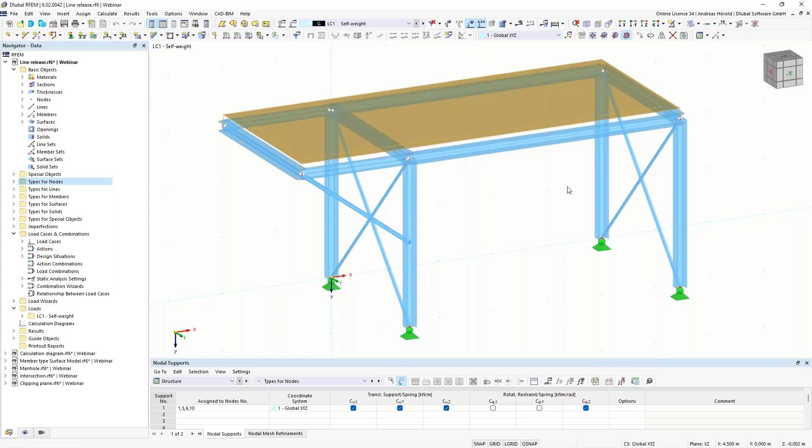It's a quite simple structure, a steel construction, and on the top of the steel construction is a concrete slab with an eccentricity. I double click on it, and I checked here eccentricity. When I go to the eccentricity, you can see that it is an automatic offset, and I defined that the bottom of the concrete slab is at the same place as the top of the steel structure, member number 18. This is member number 18.

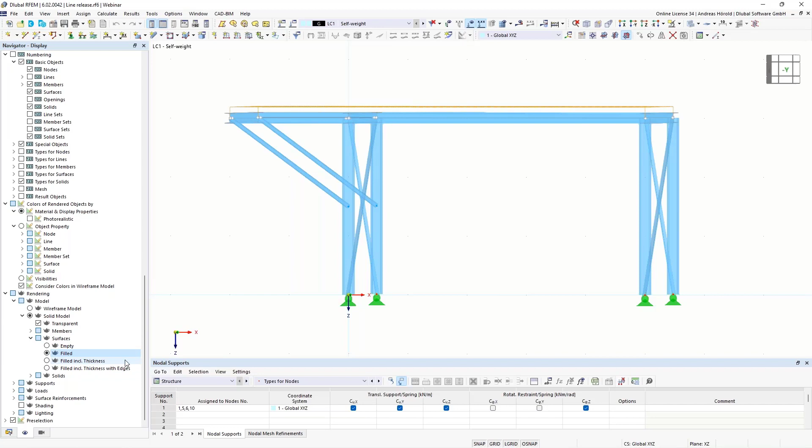Okay, to see it better, I go to the navigator display, then solid model, surface is now filled, and this is filled including thickness. Okay, I would like to display it without the thickness. So the target is that when I assign a load in that field here, this area of the slab can take off. This isn't the case at the moment.

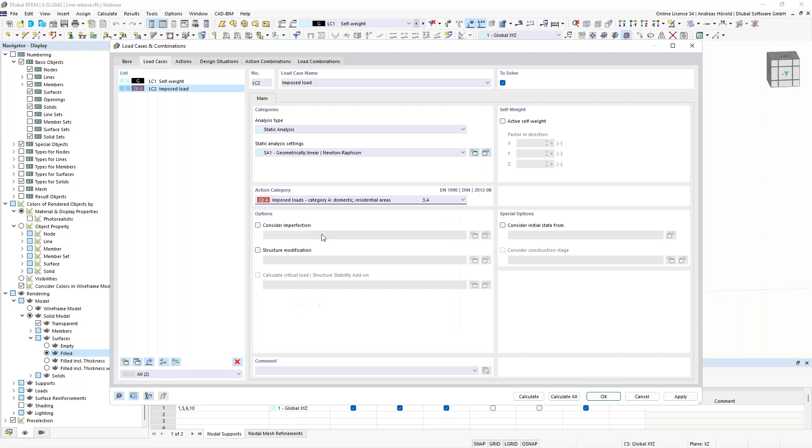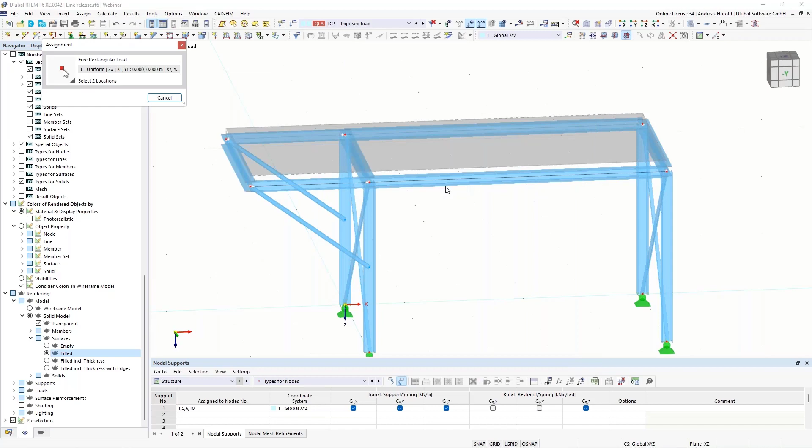Let's try that. I create a new load case with the action category imposed loads. Since it is a full slab here over 2 fields, I have to define a rectangular load: insert, loads, and then rectangular loads is the feature that I use. So I select the slab. Then a quite high load, 20 kilonewtons per square meter. And I define the edges. Okay, that's all.

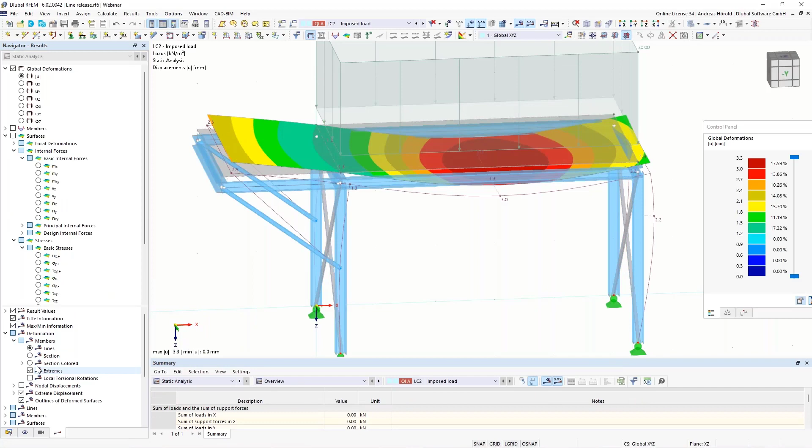So, I calculate the load case. And you will see that the concrete slab can't take off. I displayed the sections colored. You can see that the slab doesn't take off here in this area. How to do that? With a line release.

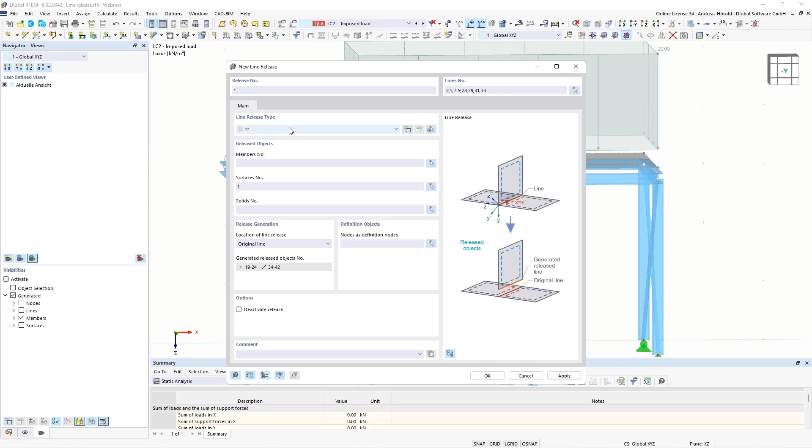So insert, special objects, and you can find the nodal releases, line releases, and surface releases here. They act the same way, and in this example I use the line releases, since they work similarly. I select the lines, all the lines in place, and I release surface number 1. It's only one surface, and I have to define the line release type.

In the first step, I release the u-z direction, and I use this nonlinearity fixed if positive u-z. That means if the load is in plus Z direction, it is fixed, but it can take off if the load is in minus Z direction. Okay, let's try that. We calculate the load case again.

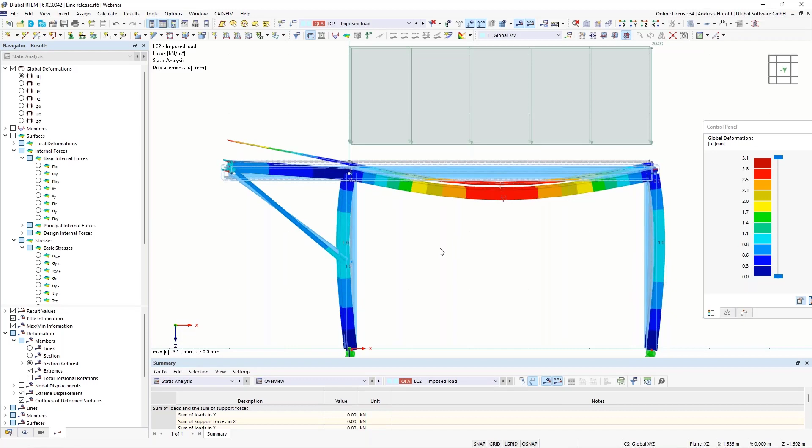So, and now you can see that the concrete slab takes off. But in that area, the beams act as composite beams because of the eccentricity of the concrete slab. At the moment, we have a deformation of 3.1 millimeters. And when I release the slab in direction X and Y, then we will get a higher deformation. Then the concrete slab lies loosely at the top of the steel structure.

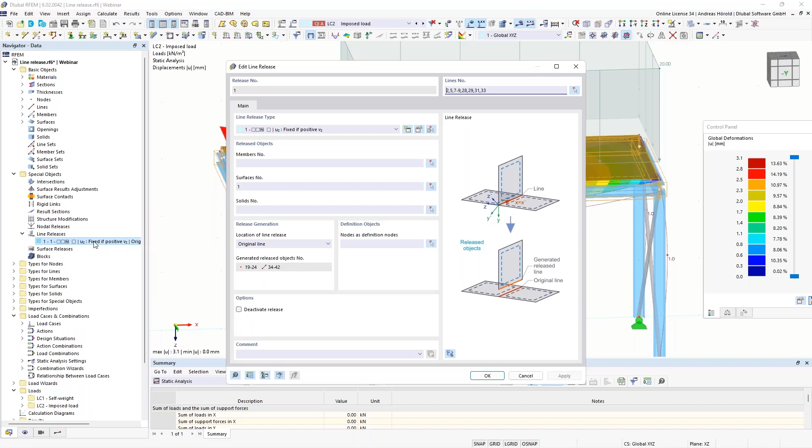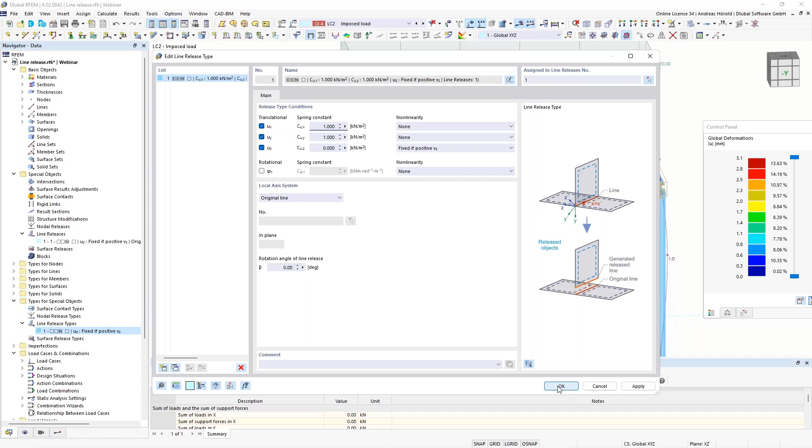So in the navigator data, under special objects, you find the line releases, and you can double click on it, or you can search for the types for special objects, and you can double click on the line release type, and then the same dialog opens. Okay, then I release the concrete slab in Y and X direction, but I have to enter a small spring so that the slab can't be moved; then it would be unstable when it would be 0.

Okay, we had a deformation of 3.1 millimeters. Now they aren't composite beams anymore, and that's why we get a higher deformation of 5 millimeters. Okay, then we turn back to the PowerPoint slide.

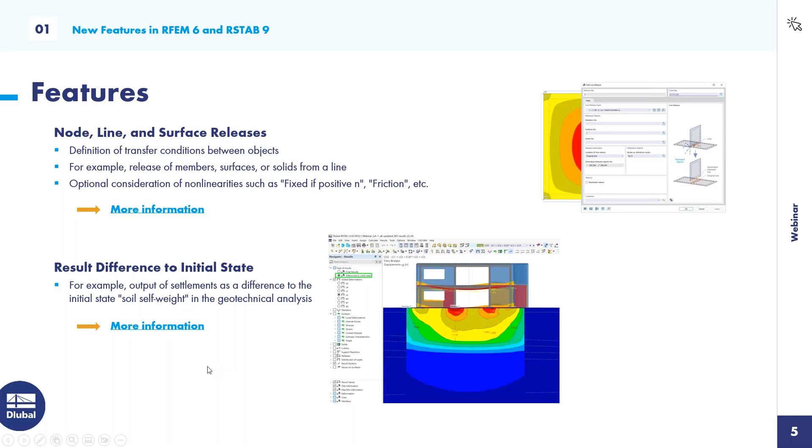Next feature, result difference to initial state. This feature is useful, for example, if you would like to consider the soil self-weight as an initial state in the geotechnical analysis. We showed that feature in the latest webinar about geotechnical analysis. You can find it on our website.

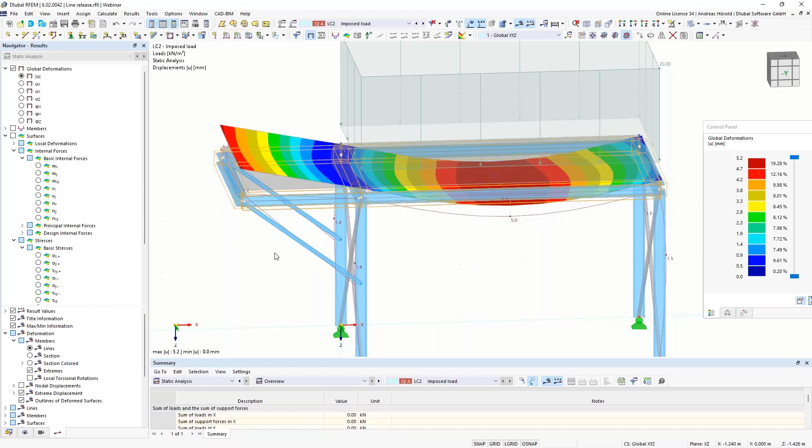So next features, small, but I think good features. The zoom with window with the right mouse button, or the animation of deformations. I showed it in the program. So if you click with the right mouse, then you can zoom in here. I don't use this feature because I have a scroll wheel, and I can zoom in and zoom out with the mouse wheel.

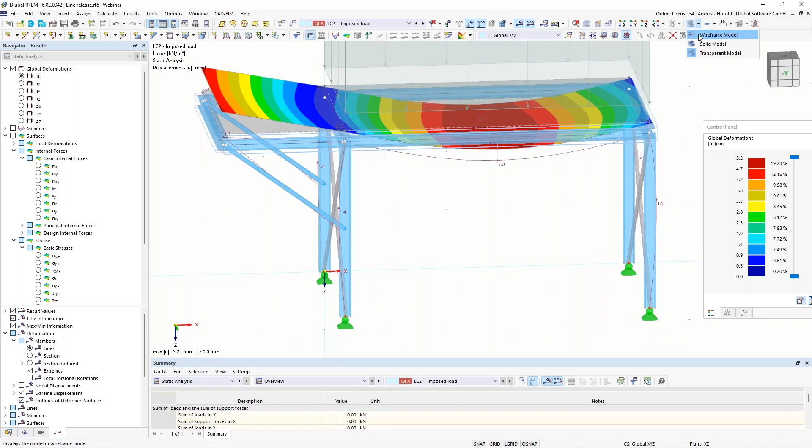I switch to the wireframe model. You can select objects by pressing, or more than one object with the control key. I hope you see the plus on the cursor. Yeah. Okay. And with the shift key, you see a minus. I hope you can see it. And you can exclude it from the selection. So double click on an object, you can edit the object, or right click, you open the context menu.

And if you select anything and when you press the CTRL, the control key, then you can copy those columns here, and without pressing the control key, you can move them via drag and drop. Okay, that should be all to the mouse functions. Here under the load cases, you can animate the deformations, also with colored sections. So, okay. Then we turn back to the PowerPoint slides.

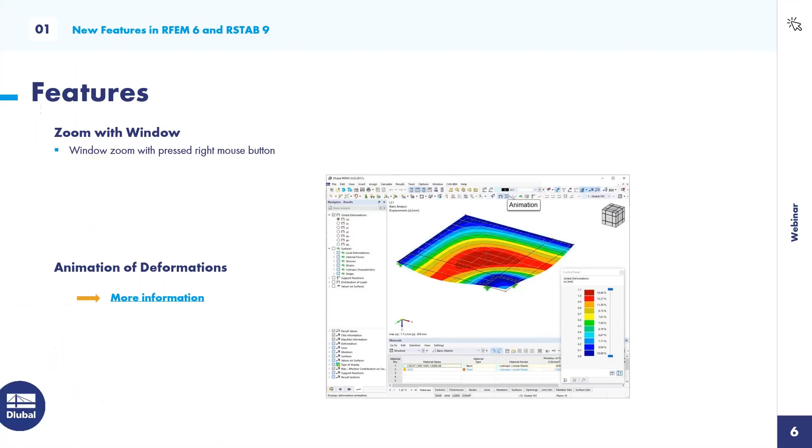Next feature, save as version. You can save different model states within a model. You can define an automatic save, and you can adjust the cycle. I'll show it also in the program. File, save as version. And when you open the base data, also left above, then you can find the register history, and you can find that saved version.

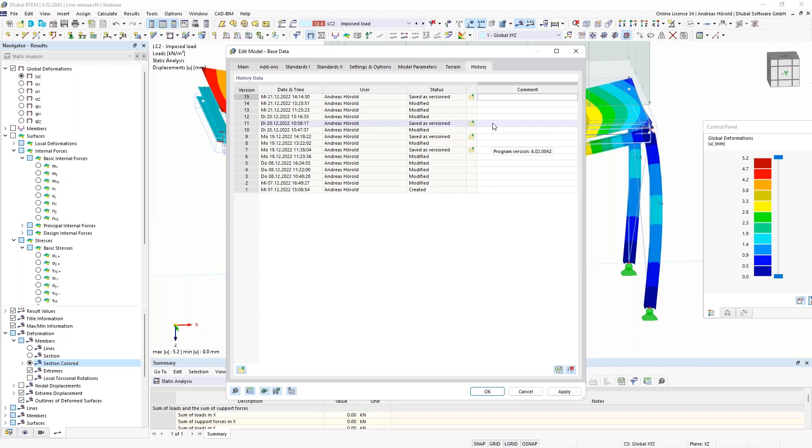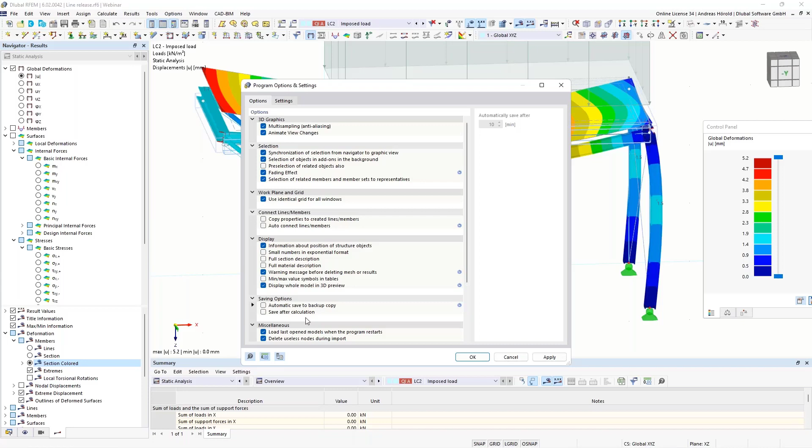I've already some saved versions because of the German webinar. You can add comments, for example, completed steel structure or completed model without loads, etc. Okay, and under options, program options, you can find the automatic save function. And you can adjust the cycle. It's also possible to save after every calculation. Okay, then next features.

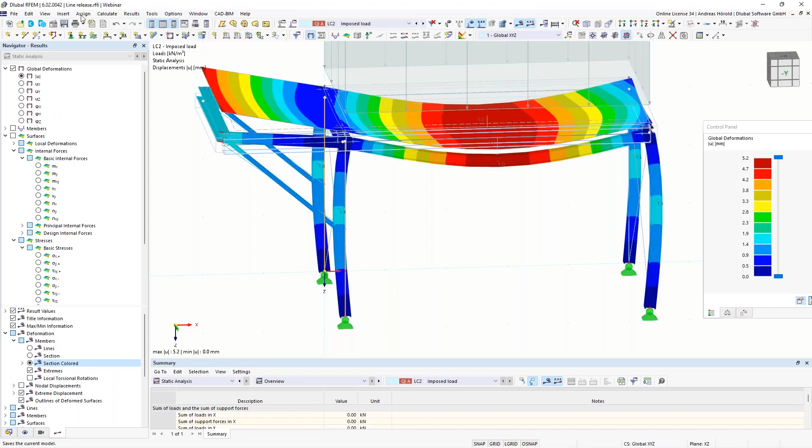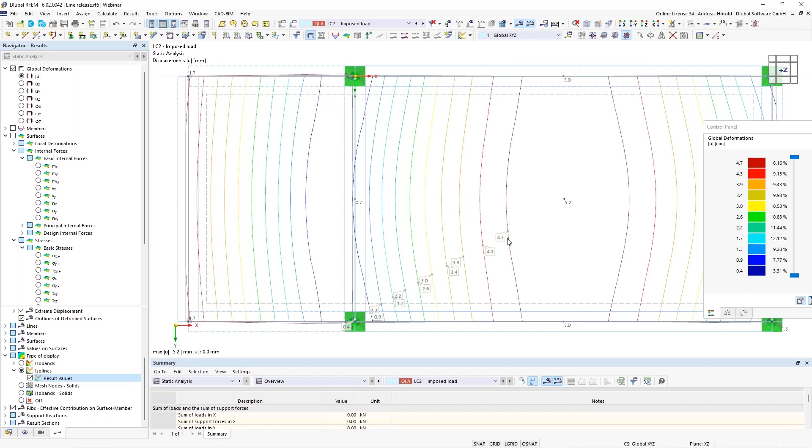Displaying result values on isolines. For example, for deformations, internal forces, stresses, and so on. I can show that also in the program. We change the view, set direction. So, okay. And when I scroll down to the isolines and the result values, then you can see the isolines and the result values. Yeah, it can be quite a good feature when you document pictures in the printout report. Yeah, the same is valid for internal forces and so on.

Okay, also another feature, I change to the isometric view, is the perspective camera. It was wished by several users, and we implemented that. It was already there in RFEM 5. Okay, then

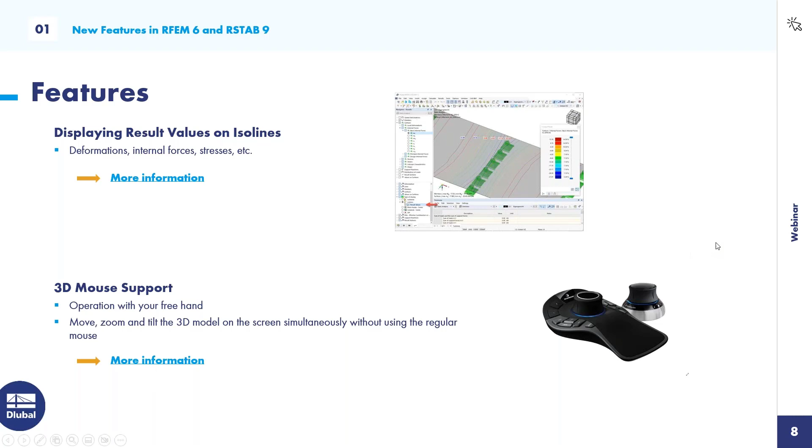next feature is the 3D mouse support. You can operate with your free hand. I haven't got a 3D mouse, that's why I can't show that. Yeah, but I would like to mention that feature. And anytime you can find more information when you download the PowerPoint slides and then click on the link. At the end of the webinar, I'll show you where you can find the slides.

Then creation of calculation diagrams. You can represent relationships between different results, for example, stress-strain, internal forces, deformation, etc. I would like to show that with another model.

A simple column fixed at the bottom, and on the left side in the navigator data, there are the calculation diagrams. I already created two diagrams. For example, for the static analysis, the increment, maximum deformation, and you can see such a diagram. It's non-linear because I use the large deformation method. So that's for the static analysis, and this diagram for the stability analysis.

I create another diagram, and you can see the options on the horizontal axis. There are different types: members, global deformations, member strains, etc. I use nodes, global deformation, UX, and the node at the top.

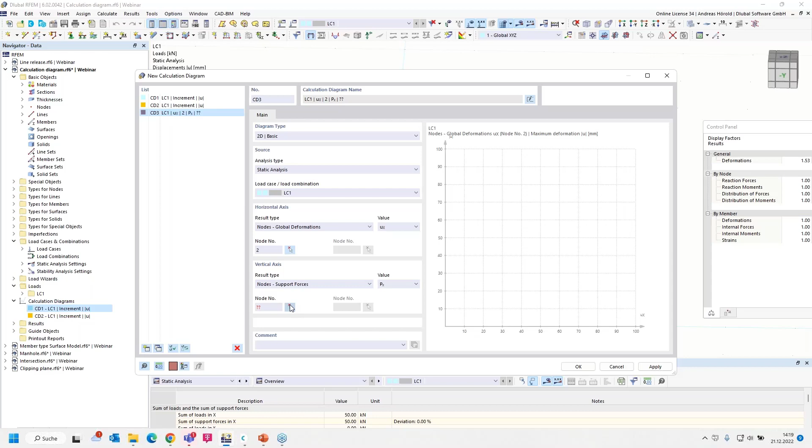And I use here nodes support forces, PX, and the node at the bottom. And then you get such a diagram. Okay, that was wished by a lot of users. Then back to the PowerPoint slides.

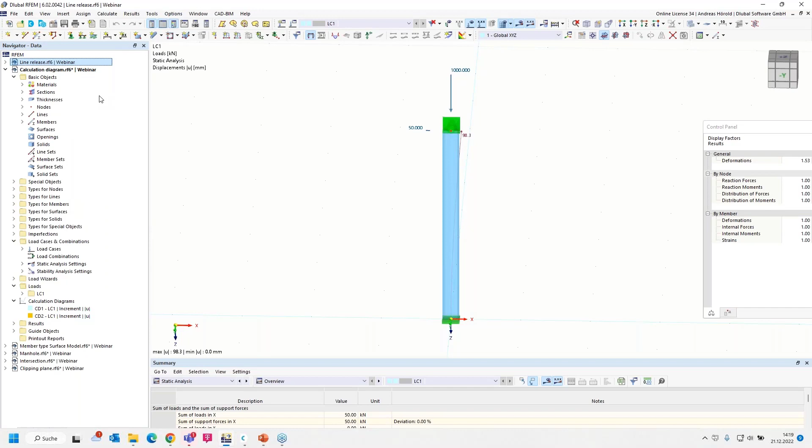Changing node types. You can adjust the type and location. I would like to show that also in the first model. For example, for this node, when I double click on it, you can change the node type, for example, from on member to standard. You can add supports, mesh refinement, releases, etc.

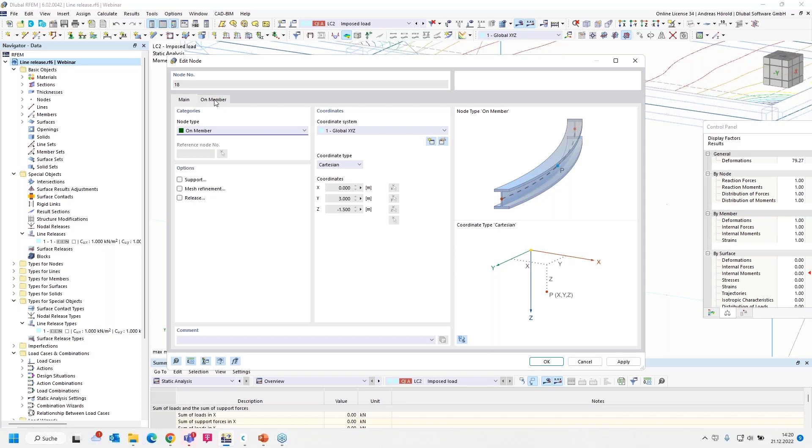And you can change the distance between the two nodes. For example, I can change that from 50 to 20% and apply that. Okay, and the node has been moved. I undo that. Okay, then PowerPoint slide. Next features.

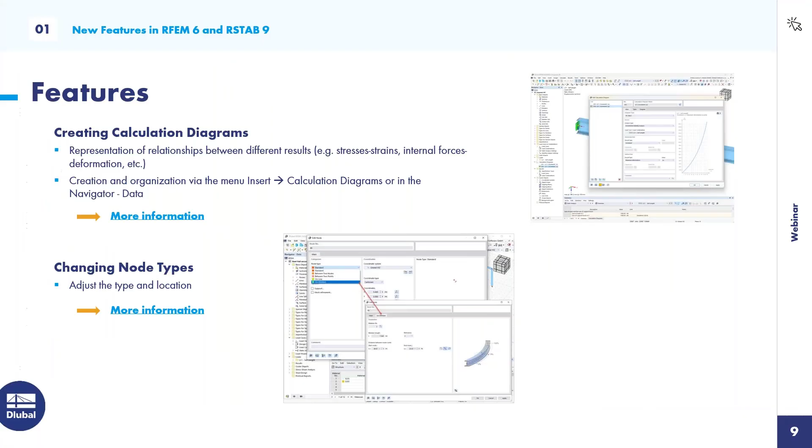A quite powerful feature, the member type surface model. You can simulate openings in webs. You can consider the real stress distribution. And you can use the member results in the add-on. You can use it for castellated beams, perforated beams, beams with rectangular openings, Vierendeel trusses, etc. I would like to show that in another example.

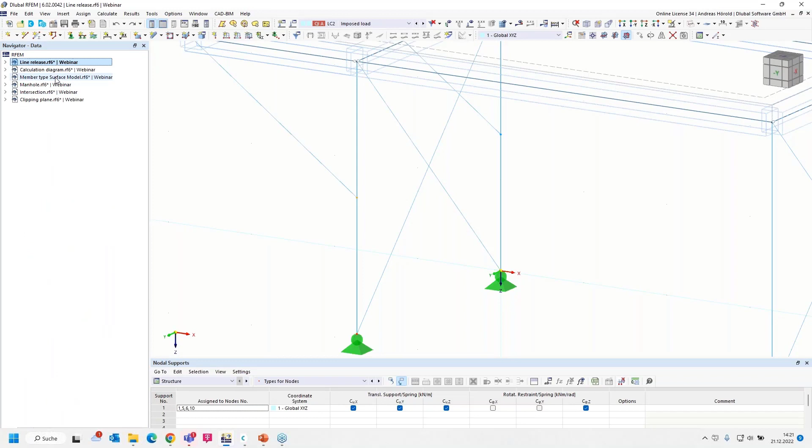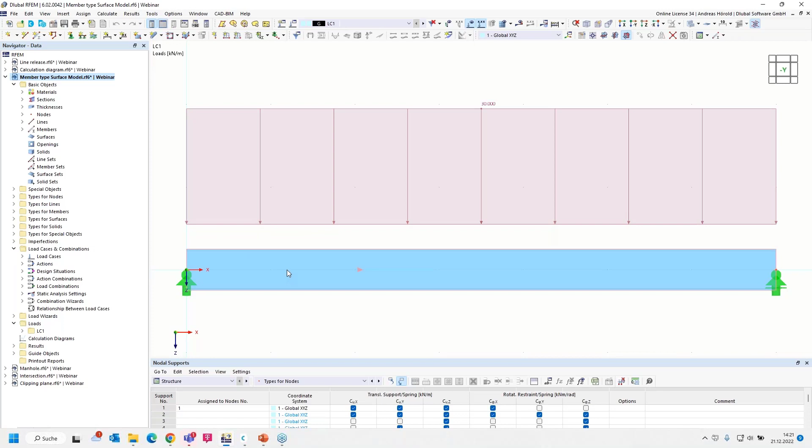I've already prepared a single span beam. The cross section is an IPE 500. And I would like to add holes here, or openings. So I double click on the member and change the member type to surface model. And I select here member openings. A dialog was added, member openings, and I define the openings.

There are three reduction types: rectangle opening, you can see that here in the preview, the circle opening, and the hexagonal opening. So a typical castellated beam is displayed here in the preview. I select the circle opening. I start at 0.5 meter, and I would like to add more than one opening.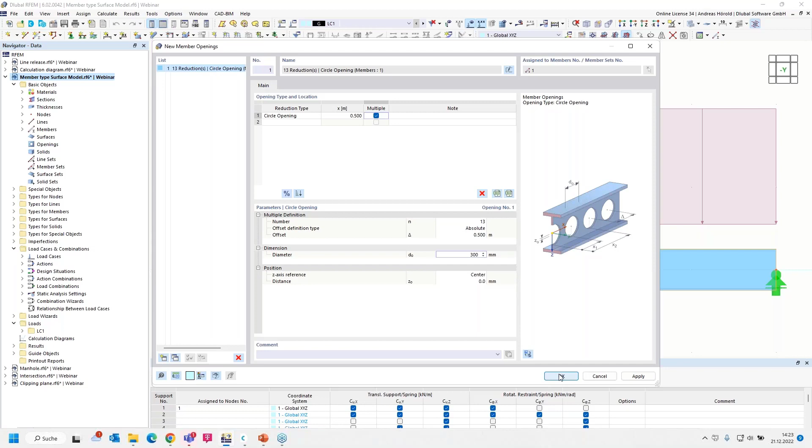13 openings, and the offset can be absolute or relative. With relative, you have to enter % here, and I choose absolute. The offset should be 0.5 meter, and the diameter 300 millimeters. Okay, I apply that, and you can see the circle openings.

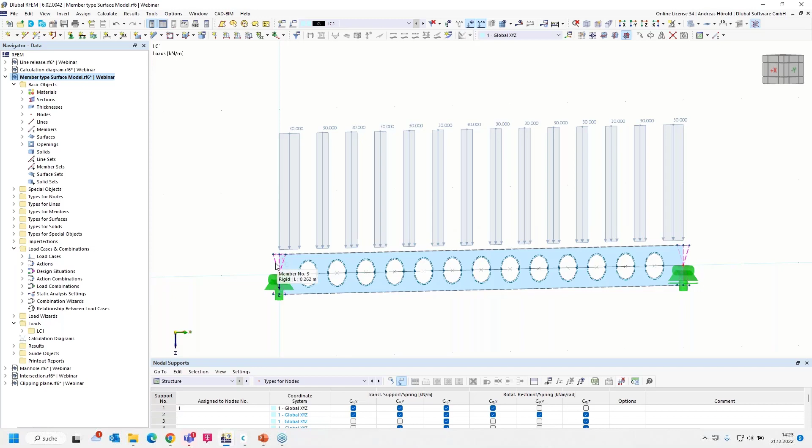Right above, there's a new button, and you can switch between display surface model and the normal model. So you can see rigid members here so that you can connect members, for example, if you want to consider such a model in your complete member model, the stiffness, for example, of such a member.

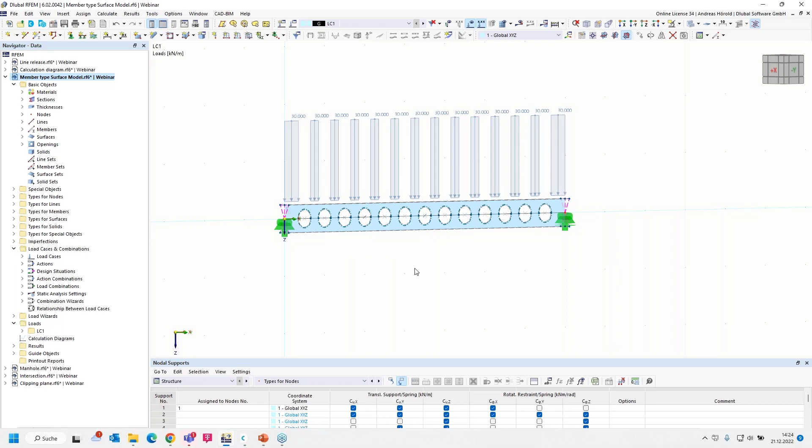You can see that the load has gaps. I entered the load in the middle of the beam, and I would like to correct that there are gaps. In the navigator data, there are the loads. And you can see the new line load and the member load, and both are still connected. If I change the member load, the line load will be changed.

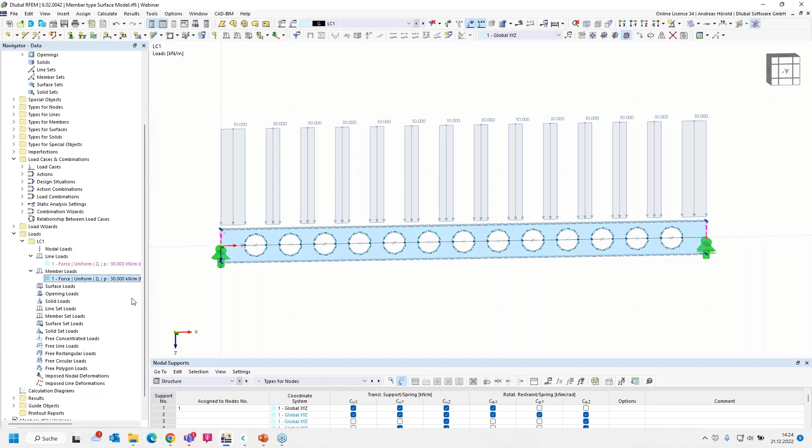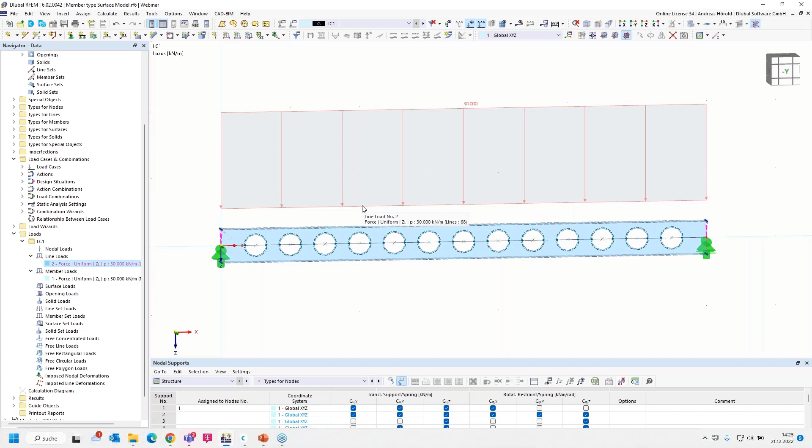So I double click on it. Then I select eccentricity, and under force eccentricity, I select the top of the member for the load. Okay, and now you can see the member load and the line load. The line load acts on line number 68. You can see that in the preview, and this line is line number 68. Okay, that's correct now.

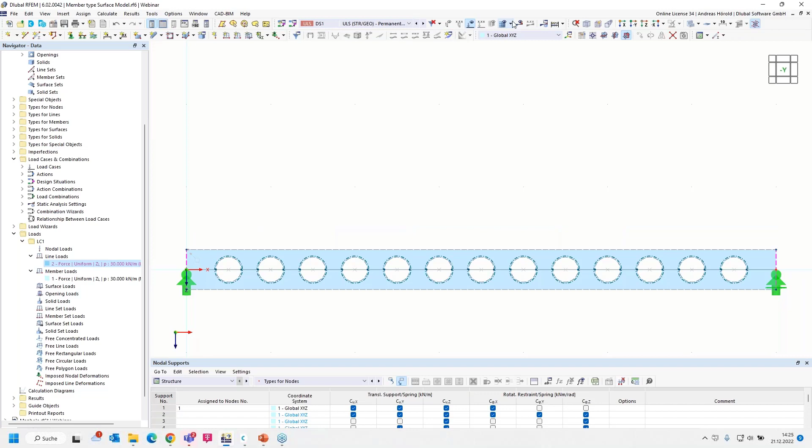So then we can calculate. I have also defined a design situation, with only one load case, but I use that design situation. And now you can see, for example, the surface stresses, basic stresses, principal stresses, and so on.

And if you want to do a real design, then you have to go to the base data and activate the add-on stress strain analysis. Okay. And I change the settings of the stress strain analysis. I select only the surfaces for the design.

And now you can see also a stress ratio, the different stresses, sigma eq v max von Mises, for example. Yeah, that's a normal stress analysis.

If you want to do a stability design, you have to activate the add-on structure stability, and with the eigenvalues, you have to define imperfections and assign that to the structure and do a stability analysis. But for such a stress analysis, we would be at the end. Okay, that should be all to that feature.

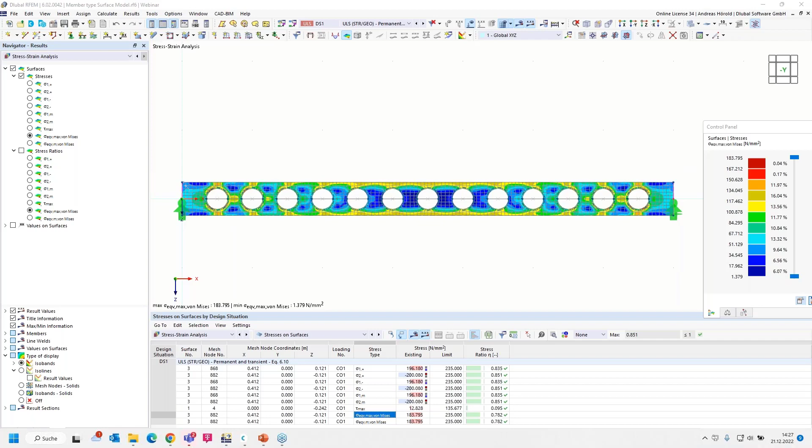Next feature is plastic hinges according to FEMA 356. It's possible to create pushover curves with that feature. In the future, we will implement the new add-on pushover analysis. I will mention that in the prospects.

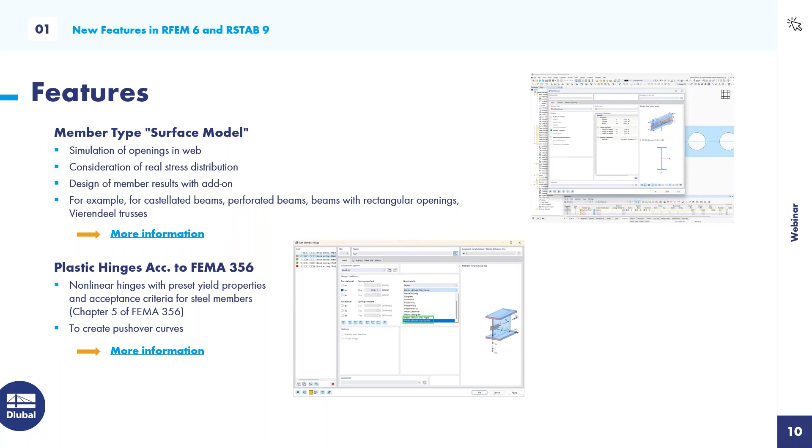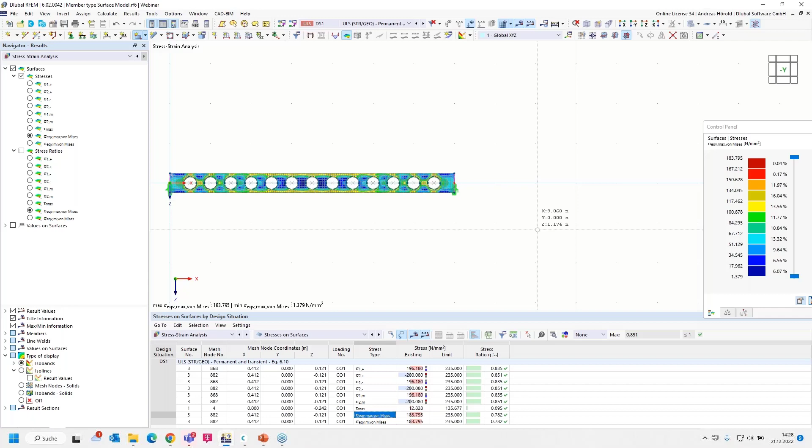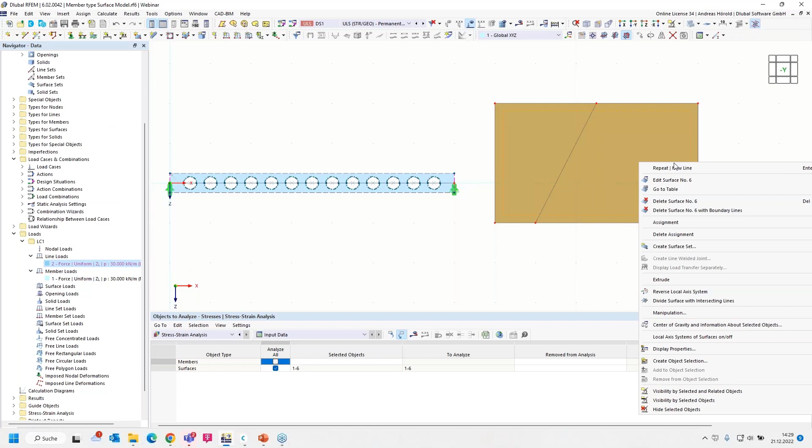Okay, next feature, dividing surfaces with intersection lines. That's quick to show. I create this simple rectangular slab. Doesn't matter what materials. Okay. Then I draw a line. So it's still one surface, but when I right click and then select divide surface with intersecting lines, now I have divided it, and now those are two surfaces.

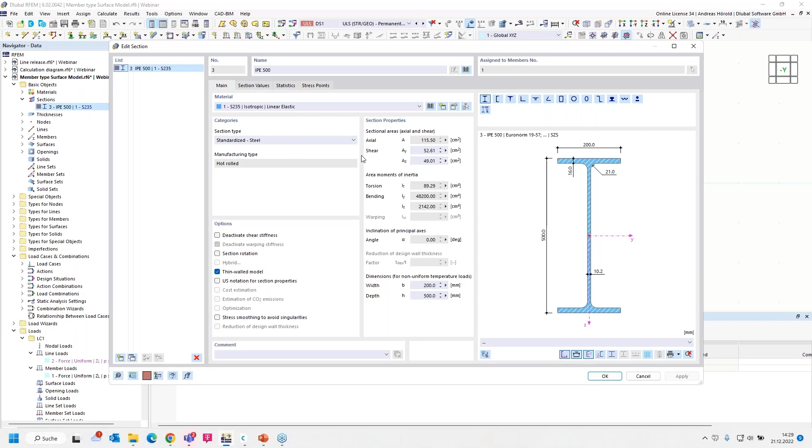Okay, then next feature, accessing the manual's chapters with the F1 key. It's also a powerful feature when you need help. I go back to the program. For example, that's the cross section, and you can go to any chapter here or any dialog. And when you press the help button at the bottom left, or you press the F1 key, then it moves to the stress points, to the chapter that is connected with the dialog. Okay. That's all to this feature.

Next feature, intersection of curved surfaces and solids. There is a new surface type, trimmed, for the intersection of curved surfaces, for example, for pipe penetrations, twisted openings, and so on. And for solids, there are two new types, hole and intersection. You can use it, for example, for complicated construction pit shapes, perforated solid shapes, and so on. I would like to show those two features in the program. I start with the second feature, with the solids.

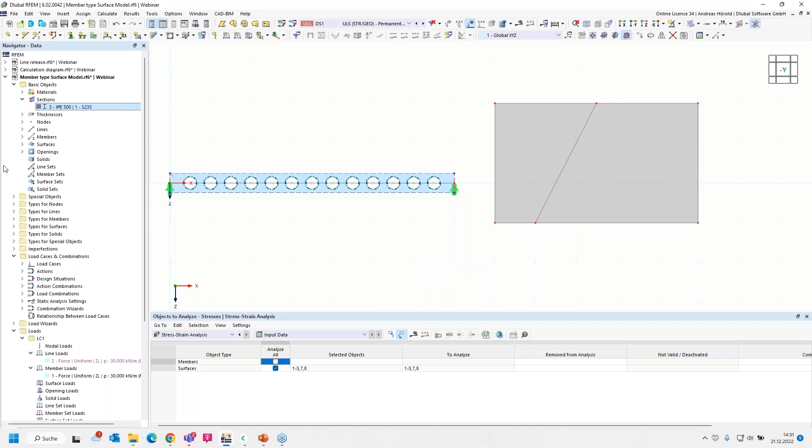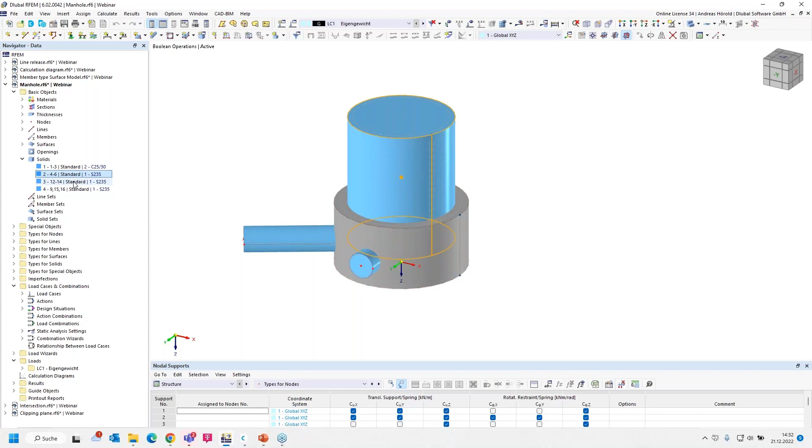So next model, manhole is the name. I created 4 different solids. I can open them in the navigator data. 4 cylinders. I use different materials, concrete for the manhole that I would like to create, and those solids are steel. And if I want to use Boolean operations and subtract those solids from this solid, I have to select the 3 solids, then right-click and edit the solids. And I select the solid type hole. Okay.

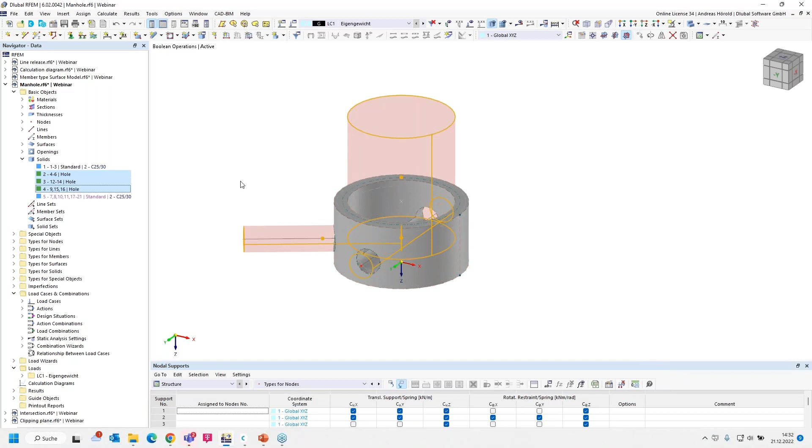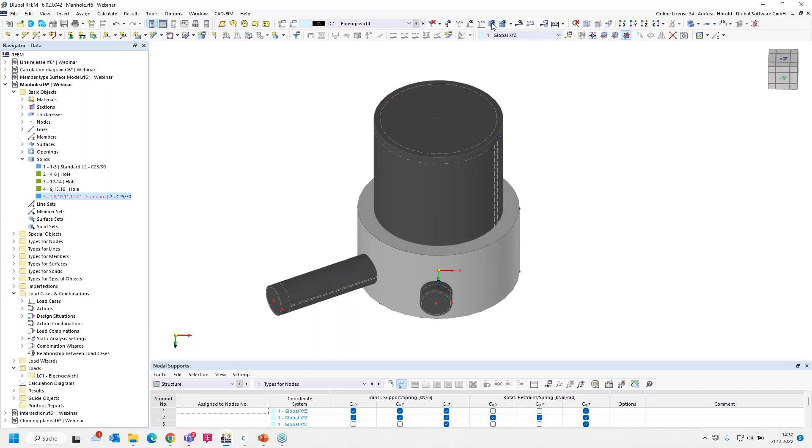And now the 3 solids are subtracted from the first solid, and that's the manhole with openings for pipes, etc. Only a simple example to show that. And with that button here above, you can switch between different display options.

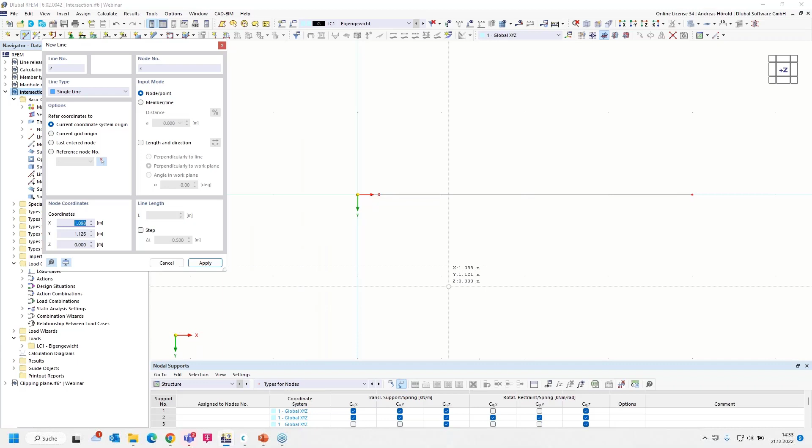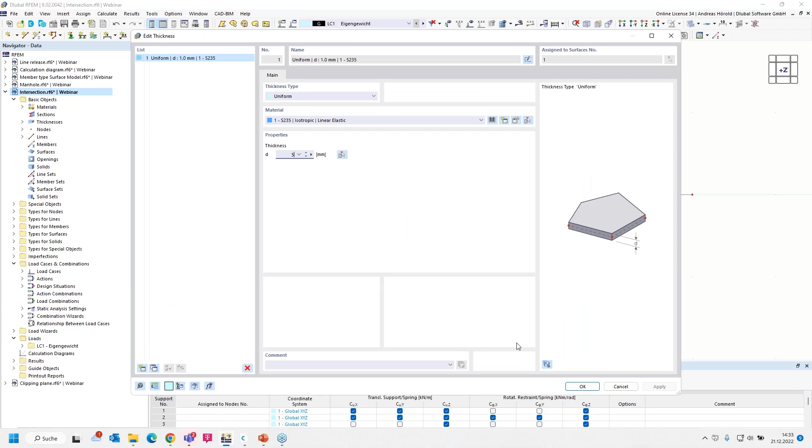Okay, next model for the intersections. It's an empty model. I draw 2 lines. So, such a crossing. And I enter pipes. The thickness of the pipe actually doesn't matter, but I change it to 5 millimeters. And under the dialog pipe I define the radius, 20 centimeters. Okay. The first pipe is created.

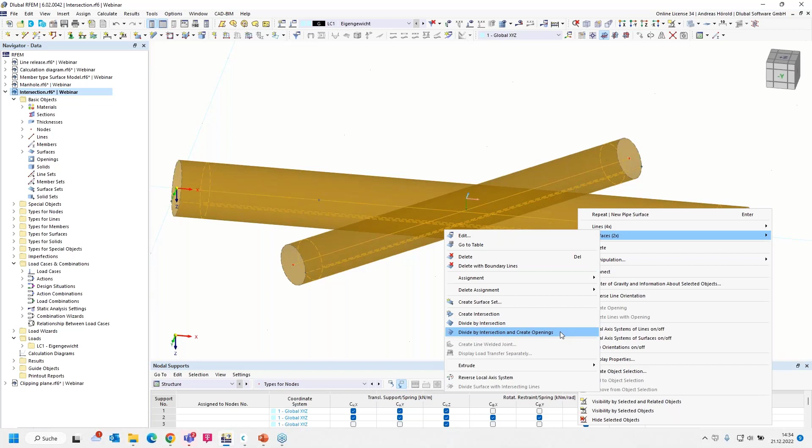And with enter, I go back to the dialog and I define a radius of 15 centimeters. So there are 2 pipes, but they are not connected. When I select them and with a right mouse click, I open the dialog, and under surfaces, you can find the options: create intersection, divide by intersection, and create openings. I select the middle feature, and you can see now there are intersections with different components.

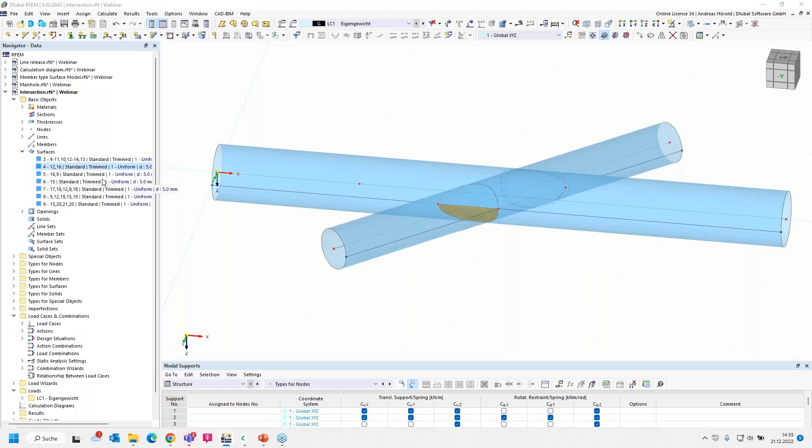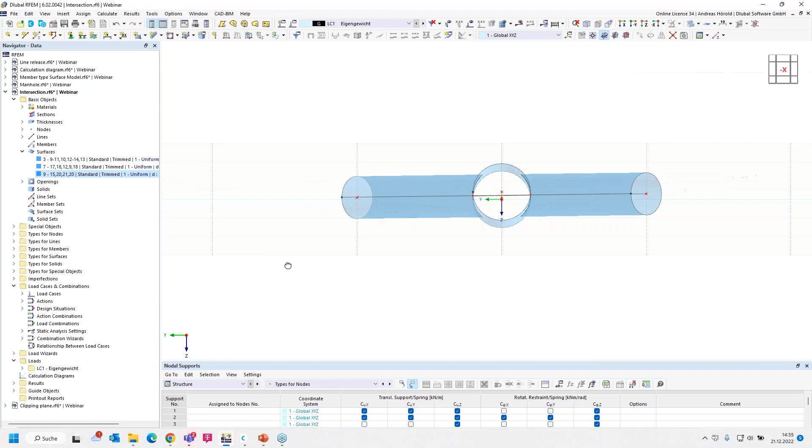On the left side in the navigator data under surfaces, you can find the different components, and they are trimmed. I click through the single components, and I select those components that we don't need. With the Control key, I can select more than one surface. This one, not this one, but this one, and not this one. And I delete them. And now we can take a look through the pipes, and that's the intersection line here, a NURBS line. And the pipes are now connected.

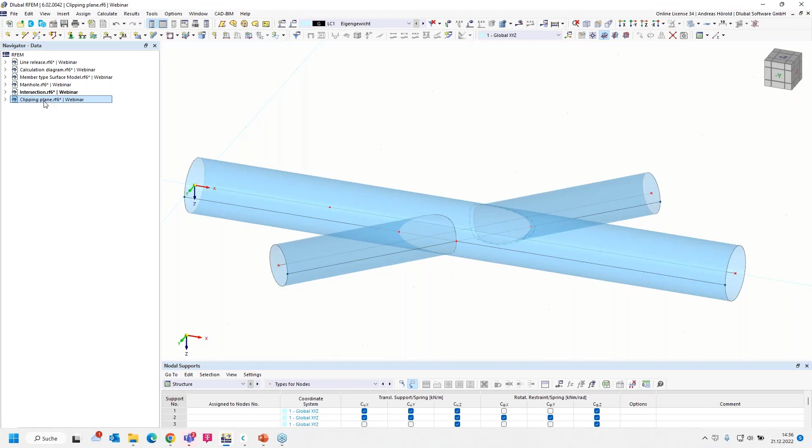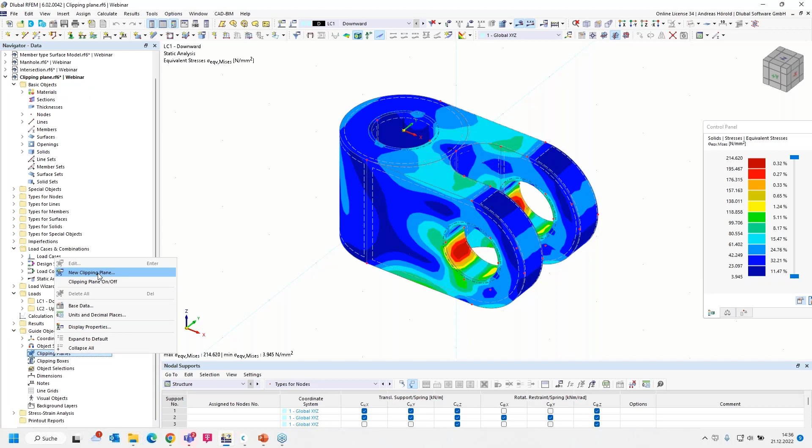Okay, then we turn back to the PowerPoint slides. Moving the clipping plane is also a good feature to evaluate your results. I go back in the program. It's good to show on such a solid model with results. Under guide objects in the navigator data, you can find the clipping planes. By right click, I can create a new clipping plane. There are different types for the clipping planes, 3 points, angle, and so on.

I like the offset because I only have to select 1 point in the model and define the plane. I press OK and set active. And then that's the new feature. You can move the plane with such a point here on all edges.

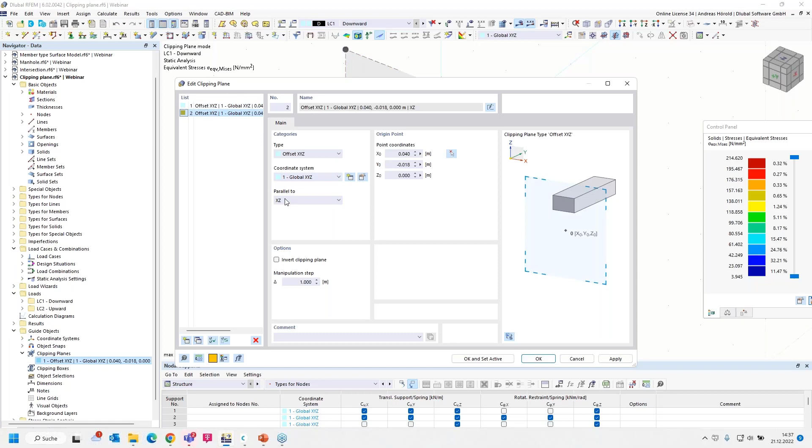So, for example, you can copy that clipping plane and only change the plane. So then you've got the same feature. Yeah, as I said, it is a good feature to evaluate your results. Okay, then to the next feature.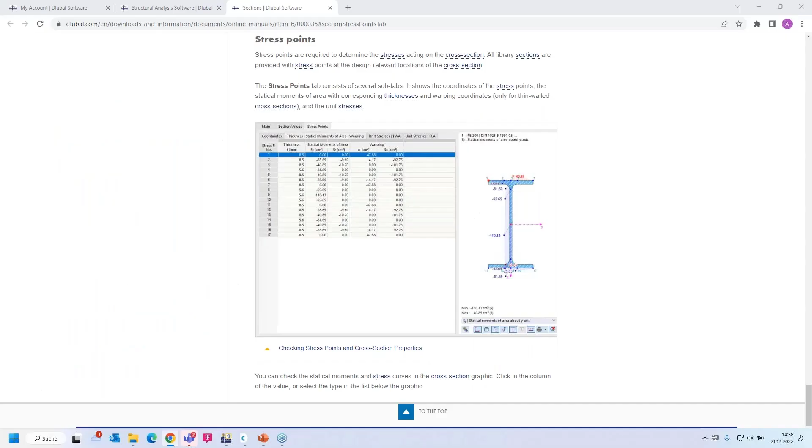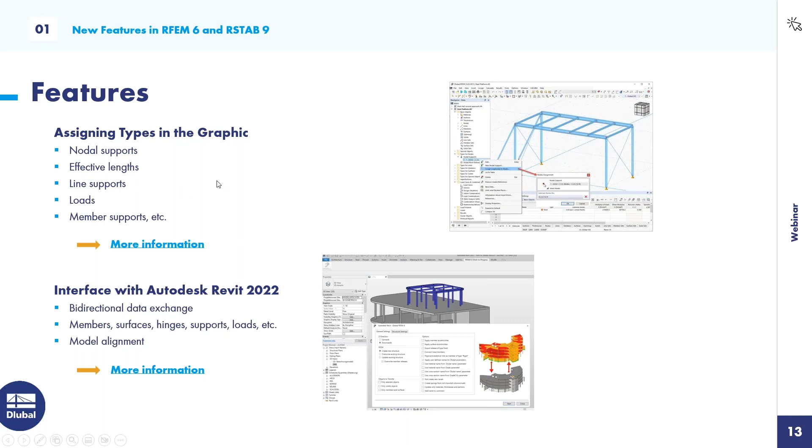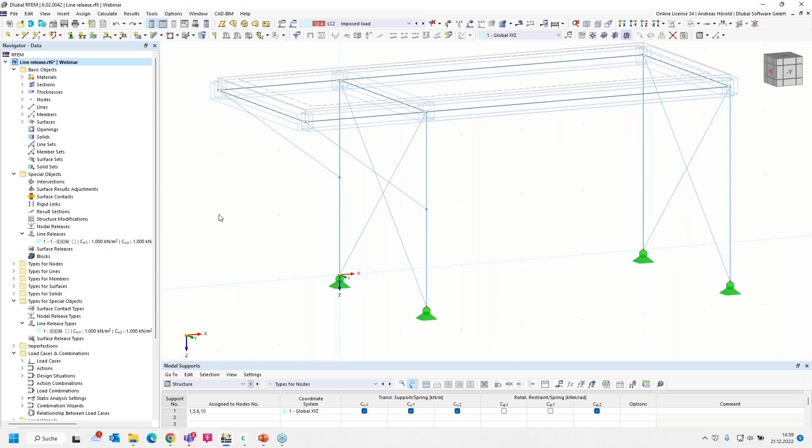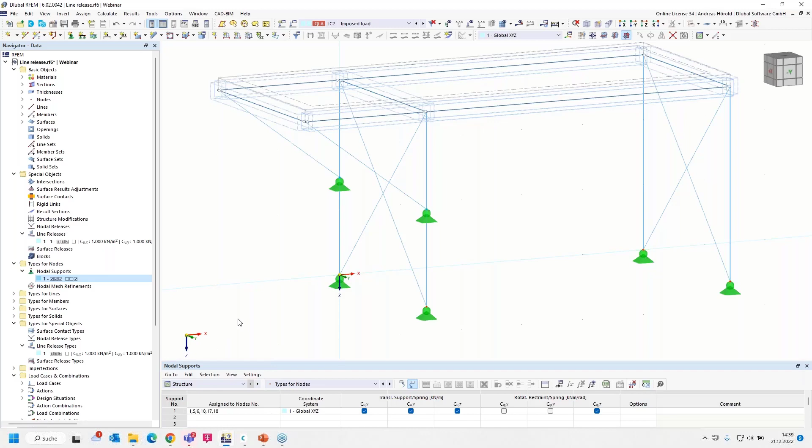But I would like to show that feature, for example, with nodal supports. I go back to the program, for example, in the first model. When you want to add such a support to different nodes, you can find the types for nodes, nodal supports, and then by right click you can select assign to nodes graphically. Right? For example, you can add them here quickly. It is a good feature, I think. Maybe better for other components such as effective lengths also.

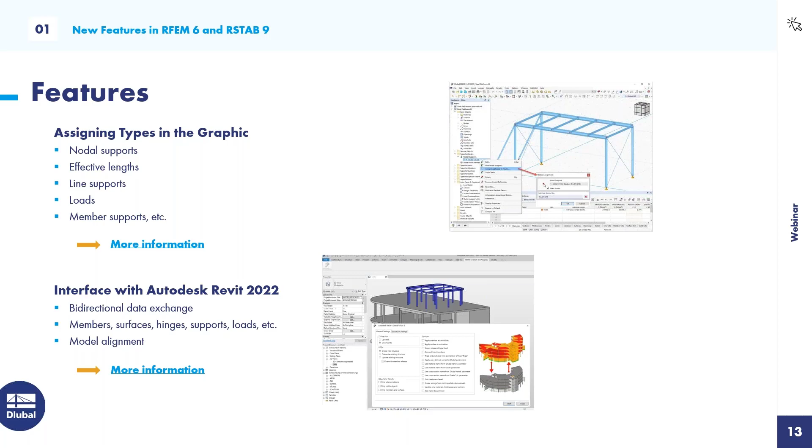Next feature is the interface with Autodesk Revit 2022. Bidirectional data exchange is possible. You can transfer members, surfaces, hinges, supports, loads, and so on. And you can update the model in the other program. Okay, that was all to the general features in RFEM 6 and RSTAB 9.

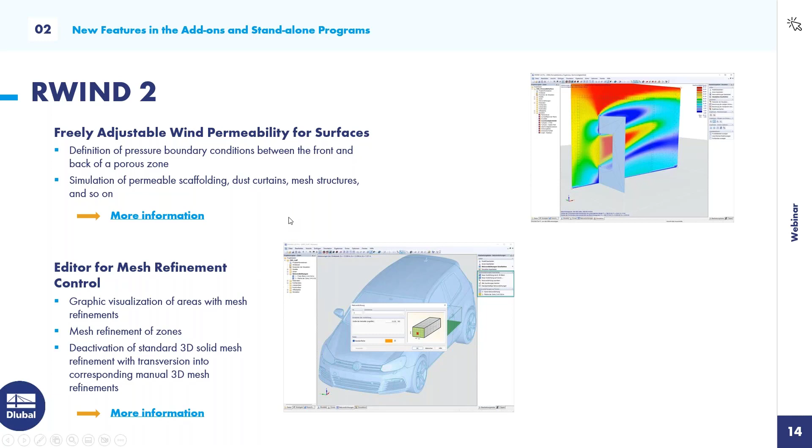Now I would like to introduce some features of the add-ons and the standalone programs. Not in the programs, only in the PowerPoint, because it's not interesting for everyone. RWIND: the freely adjustable wind permeability for surfaces has been implemented. That's, for example, for permeable scaffolding, dust curtains, mesh structures, and so on. Then the editor for mesh refinement control. Other new features are the load factors for zones, the point clouds, new auxiliary objects, and so on.

In the webinar 2 weeks ago, we presented all those features. And if you click on that link, you can watch the recording and see all the new features.

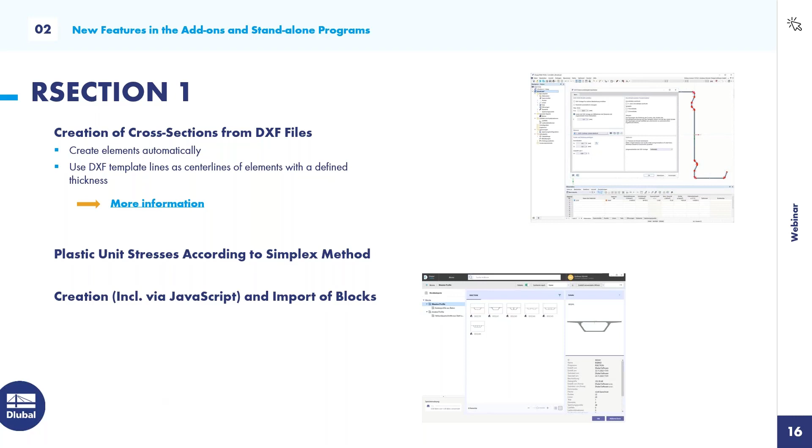RSECTION also has interesting features. You can create elements automatically from a DXF file, or you can use DXF template lines as center lines of an element with a defined thickness. For example, when you see that cross-section here, imagine you have center lines in DXF, then you import the center lines and only define a thickness of, for example, 2 millimeters. And then, with one click, such a cross-section is created. Then new features: plastic unit stresses according to the simplex method, and the creation and import of blocks in RSECTION. The creation is also possible via JavaScript.

RSECTION and Steel Design add-on. New is the graphical output of the mode shape for distortional, local and global buckling. Also for RSECTION cross-sections and for library cross-sections. New in the Steel Design add-on is the design of cold-formed steel members according to EN 1993-1-3. It's valid for cold-formed sections from the library and for general cold-formed sections from RSECTION, but not for perforated sections.

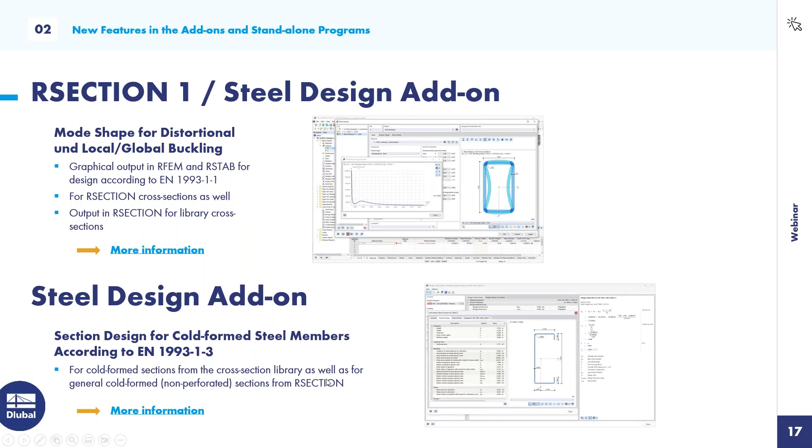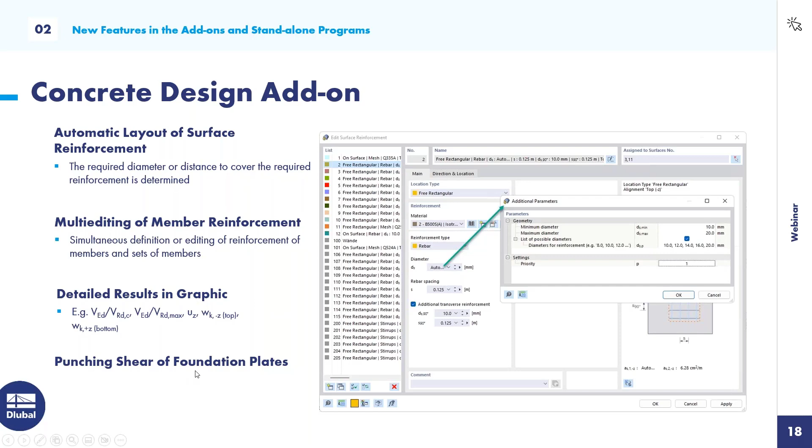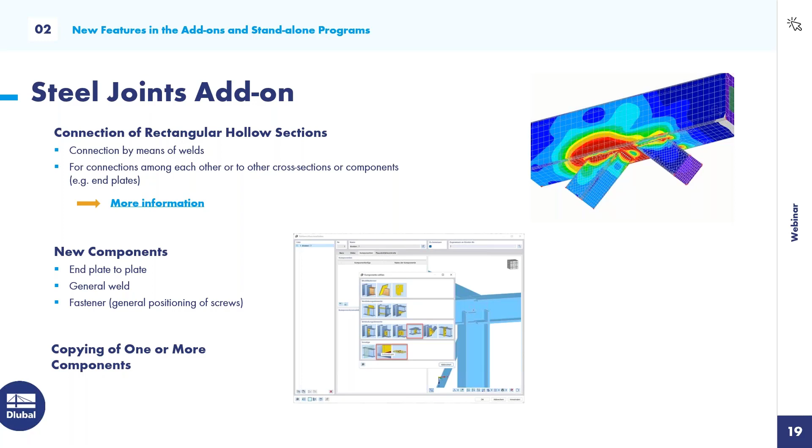New in the Steel Joints add-on is the connection of rectangular hollow sections. You can see that on the right side, and they are connected via welds. Then there are new components: end plate to plate, the general weld, and the fastener, which means you can assign a general positioning of screws. Another feature is the copying of one or more components. That's a feature we already showed in the latest webinar of the Steel Joints add-on some months ago. You can find it on our website if you are interested in the Steel Joints add-on.

Really new is the design of CLT panels in the Multilayer Surfaces add-on. You can perform ultimate limit state design, serviceability limit state design, and fire protection design. You can use it for floor slabs, deep beams, and so on. And you can treat singularities, and a fastener design is also possible.

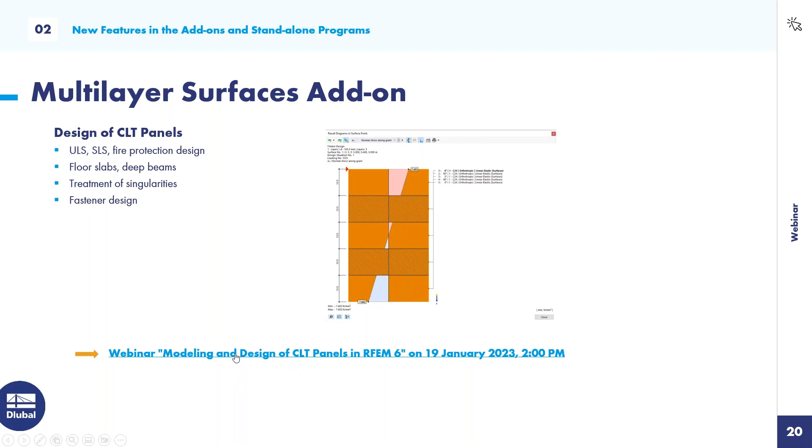The last feature of the add-ons and standalone programs is the improved segmentation for deformation analysis. It's valid for, or you can use it in the timber design and concrete design add-on for automatic segmentation for deformation limits, cantilevers and single span beams. That should be all the features in the add-ons and standalone programs.

Now we turn to the last point for today, the planned features. We will update the interface with Autodesk Revit to version 2023. Then we will implement the interface with Tekla Structures. It's also planned to implement load transfer. You can transfer the load from another model, and both are digitally linked, meaning you can transfer the support reactions to the next model and assign it as load of the structure. If you change anything in the first model, it will be updated in the second model.